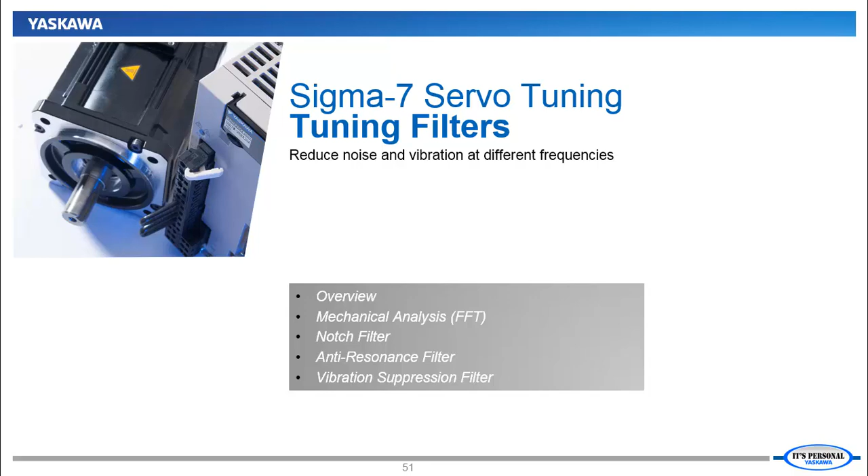Here's a quick preview of what we'll do in this video. After an overview of the tuning filters, we'll use the mechanical analysis function on the z-axis of the demo to determine what resonant frequencies might exist. Then we'll look at 3 different example mechanisms to set the notch filter, the anti-resonance filter, and vibration suppression filter, using the custom tuning window and editing some of the parameters directly. So get connected to your remote demo and follow along with me, and let's start filtering.

This chart shows the frequency spectrum of a machine from low to high. Every machine has some level of mechanical compliance and may tend to vibrate at certain frequencies. Filtering makes sure the servo control loops don't cause the motor to apply torque at those problem frequencies. This way, the machine can still be used throughout the rest of the frequency spectrum, improving performance and response.

Now there's a low-pass filter not shown here that just cuts off the maximum frequency response, but then the next highest frequency filter is called the notch filter, and it's good for covering frequencies about 500 Hz and above. Resonant problems in the mid-range frequency are covered by the anti-resonance filter, and at the lower end, all the way down to 1 Hz, into the tens of Hertz, is the vibration suppression filter. And you see there is some overlap between these filters.

The frequency parameters for each filter do have a range, but they're often better implemented in the middle of their range. And here we're listing all of the different parameters just for completeness. We'll be looking at these more closely as we look at how to implement each of these filters.

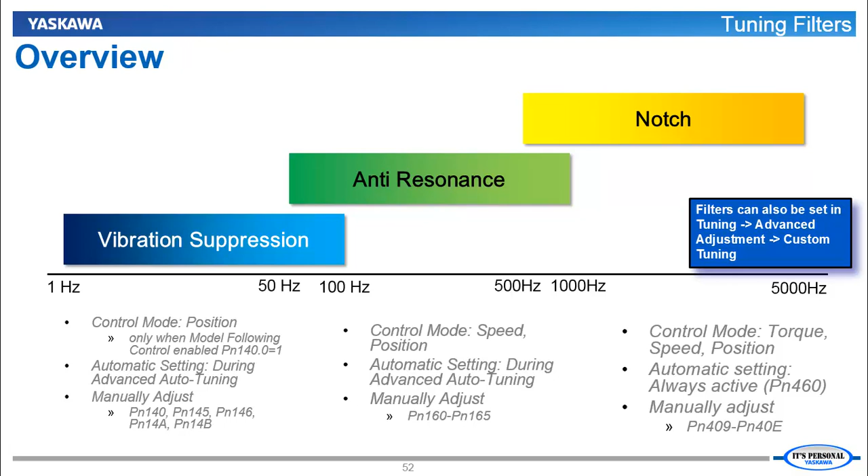So the big question is, how does my mechanism respond across the entire frequency spectrum? And to help you find this, SigmaWin+ has a tool called Mechanical Analysis. This software tool will cause the amplifier to generate its own internal torque reference frequency, sweeping from very low frequency to very high frequency. It'll run that through the motor, which is coupled to the machine, and the machine will move a little bit, and this function records the output.

And it may find that at some frequencies there tends to be an increase in amplitude, and at other frequencies perhaps a decrease in amplitude based on the properties of this mechanism. Any frequencies that have a high gain may require filtering, and if you enable the servo and you get this kind of oscillation or noise, you really need to take care of that before you can go on to do any other tuning. Oftentimes the auto-tuning will catch this and automatically apply it, but we do need to know how to apply these and understand each of these filters.

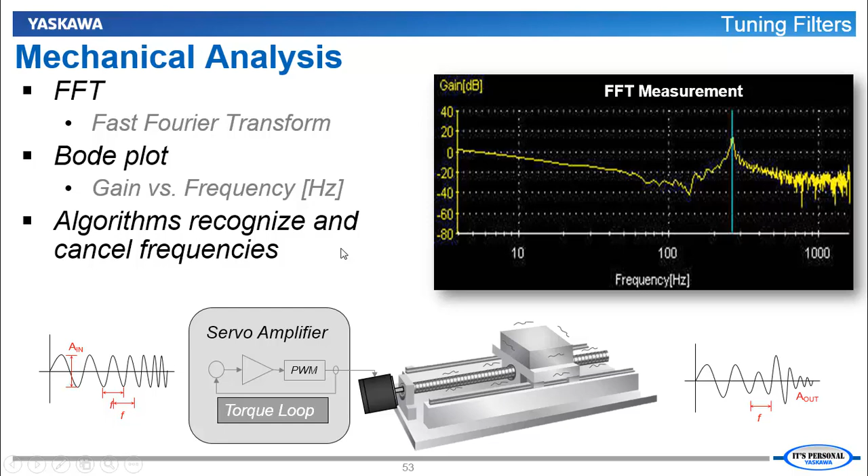But there's much to be learned by doing what we call this FFT, fast Fourier transform measurement, where we plot the gain versus frequency and look for peaks in this graph that indicate there is a problem at that frequency. This type of graph is called a Bode plot, and those 3 filters will then be able to be used based on the frequency that's found in the mechanical analysis. We'll also have a pretty good idea which of those 3 algorithms are the most appropriate to apply to the machine. Let's go try this out now in SigmaWin+ version 7.

I've got connection to the z-axis here, the SGD7S, and we've got connection here to the remote demo. And one thing you're going to want to do on this demo is get some audio feedback. You'll want to hear the chirps that go through the motor. That's instructive. You can do that with this speaker icon that says Open Audio. Be sure there's not a line going through it, and then you'll be able to hear with the microphone that's on this webcam. And then what I do is minimize SigmaWin+ a little bit and set it up so I can peek at that motor while I'm using SigmaWin+.

Now under the menu, mechanical analysis is under the solution category. The motor will move. Let's open this and then click Start. So what are we looking at here? There's a vertical mode selection just to be sure that the motor doesn't fall if you have a vertical load. You have the sampling time, and the sampling time determines the maximum measurement frequency. So the first time you do this, it's a good idea to leave this at the default so you get the maximum measurement frequency. And then later you can do another graph if the problem frequencies happen to be in the lower range.

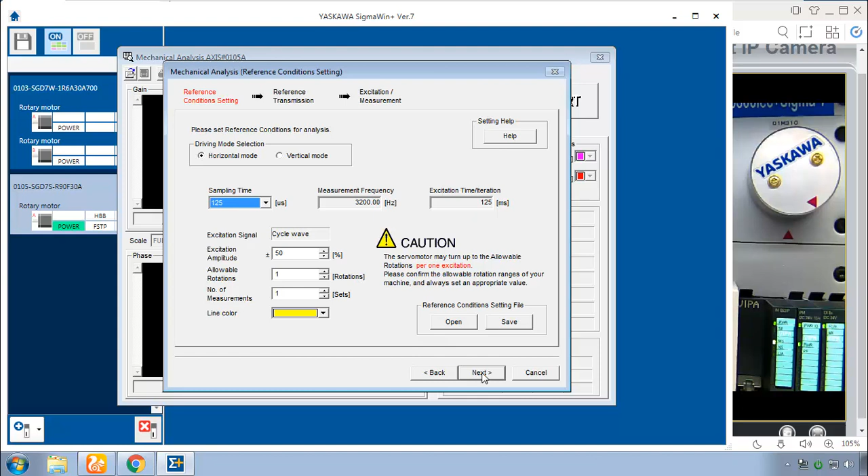Down here, the excitation amplitude is the percent of torque. 50% is pretty good. You can go higher, but you don't want to risk damage to the machine. And if your motor has been oversized or there's a torque limit in place, you may even want to reduce this. The allowable rotations is just to be sure that the motor doesn't go too far and run the mechanism into the hard stop. And you might do more than one measurement to interpolate the results between a number of measurements. For this first time, let's leave all this at default and just go ahead and click Next and Start.

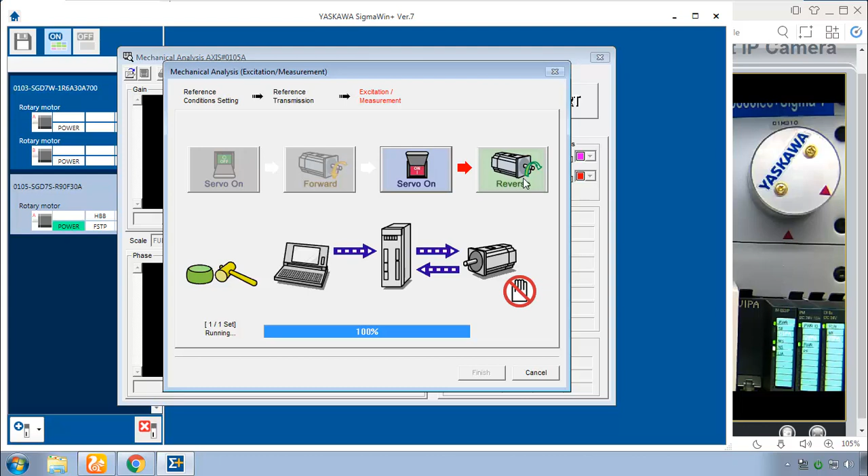This is a function of the servo itself. Keep clicking through it. You click servo on and forward. Did you hear that? Saw the motor move a little bit. We'll do it again in the reverse direction. Moves a little bit. There's a little chirp. That's the sound of all of the frequencies going through the system. And you finish it. So what we have here now is the gain versus frequency for this wheel.

There are some automatic measurements. I'm just going to clear those out. I hope you'll agree that this mechanical analysis is quite distinct from the other one I showed in the PowerPoint slide. There really is no peak, if you would. There's no big spike in the gain. It does kind of trend down.

The other part of this graph, however, is called the phase. And when the phase goes below -180 degrees, that's another good indicator that that might be a problem frequency. Right here, this is happening. And you're able to open this cursor button and drag around, look at different points. You can click a couple cursors down. You can see this frequency right here is 2000 hertz.

There's another tab here for notch filter setting. This tool is estimating a notch filter frequency of 3100 hertz, which is indicated by this pink line. So in other words, it's at the very upper limit of this measurement. Probably this wheel does not need a notch filter. After all, I don't imagine there's much mechanical compliance since it's just one wheel rigidly attached to the shaft of the motor. But since we're learning about filters, why don't we try this out?

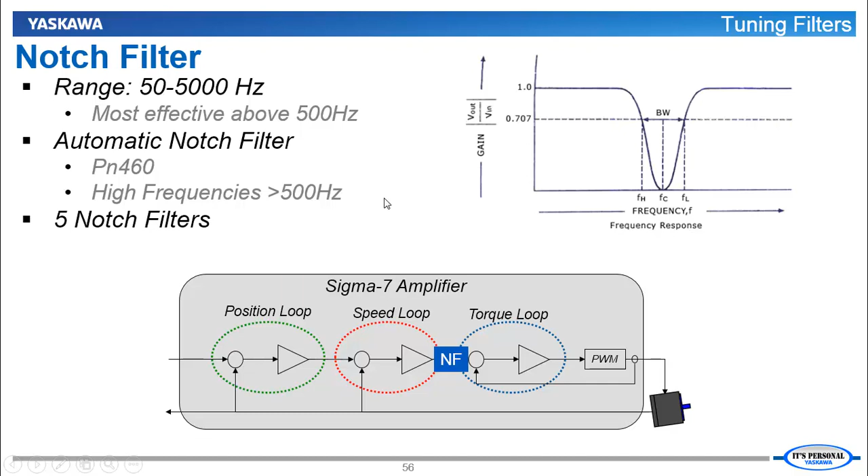What is this notch filter that we just set? Well, it's a way to filter out a narrow band of frequencies at the input to the torque loop. And it allows both lower frequencies and higher frequencies to pass through, just not that problematic frequency. And as we mentioned, it's best used above 500 hertz. In fact, we even have an automatic notch filter in Sigma7 that if there's vibration, it will detect it and set the notch filter for you automatically. We have up to 5 notch filters.

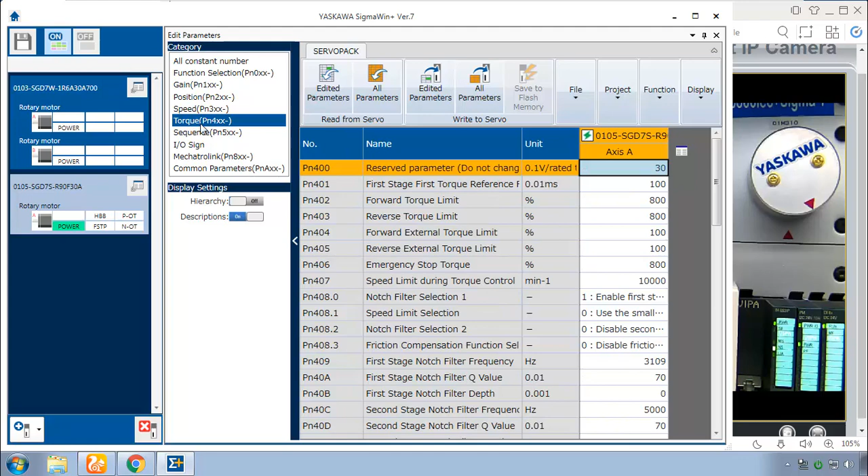Let's take a look at the notch filter parameters in SigmaWin Plus version 7. You can close out the mechanical analysis. Just go to Edit Parameters. Since the notch filter acts at the torque loop, we can go to the torque category. And here you can see all of the notch filter selections and frequency. There's the frequency that we set, 3109. There's a Q value and a depth.

Each of these 5 notch filters has a corresponding selection parameter to turn it on and off. There's most importantly then the frequency. That's the center frequency for that notch filter. This depth is just a multiplier for the strength of the filter, and the Q value is like a depth to width ratio. Depth and Q value can be left at default most of the time. If you go to extremes with these parameters, you can cause vibration in the system or make it too sensitive to the slightest mechanical change.

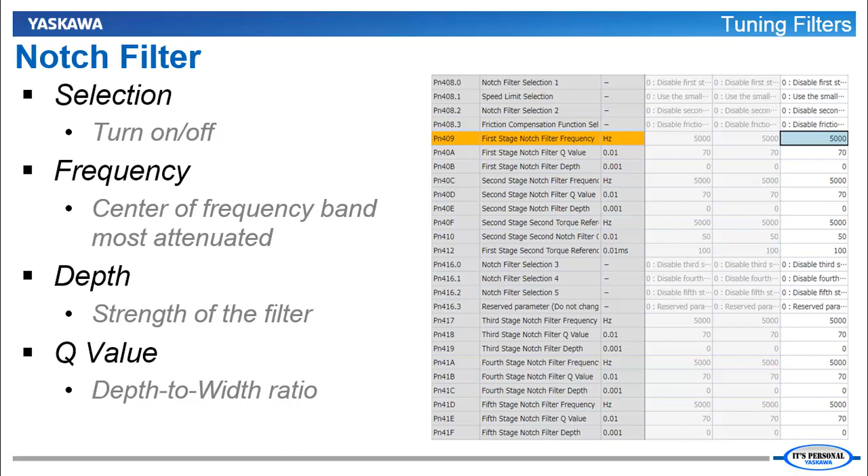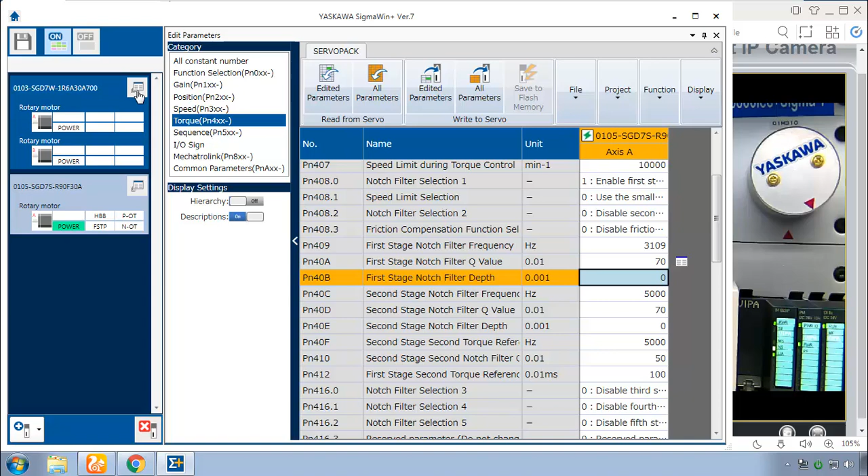Now let's look at an example of a ball screw actuator. Got the motor and the coupling and a ball screw. It's really an XY table. There's the Y-axis mounted on top, but we'll just focus on this lower X-axis. And in SigmaWin Plus, we've provided you with the mechanical analysis file. Use one of your offline axes here in the menu. You can go to mechanical analysis just to open up this file.

Got file open, and then take a look in your class materials for the mechanical analysis folder, and let's open up the ball screw mechanical analysis. We can clear out these cursors and you put down your own. Where do you think might be a problem frequency on this mechanism?

Probably right here at this peak. If you click down the cursor and look at the cursor position, what frequency is that? Mine ended up at 1175 Hertz. And you see this also corresponds to the location where the phase inverts from -180 to +180, meaning that the load vibration is driving the motor opposite the direction of the torque command.

What filter applies to this frequency range? The notch filter. This really is your classic example of the notch filter. In this particular case, I didn't really have to do anything to apply the notch filter. The actuator made a loud squeak for about 1 second, and the automatic notch filter turned on these settings that you see here. It did set a torque reference filter, slightly different than the default, enabled notch filter 2, set the frequency to 1240, it's pretty close to what we measured, and even did an adjustment on the Q value. And after that, it moved quite nicely and without any more noise.

Now let's move on to the anti-resonance filter. Do you remember the target frequency range for this anti-resonance filter? 100 to 500 Hertz, although it can go beyond that. You can see in this graphical example the vibration in the torque signal during motion before anti-resonance, and then how that's reduced with anti-resonance on.

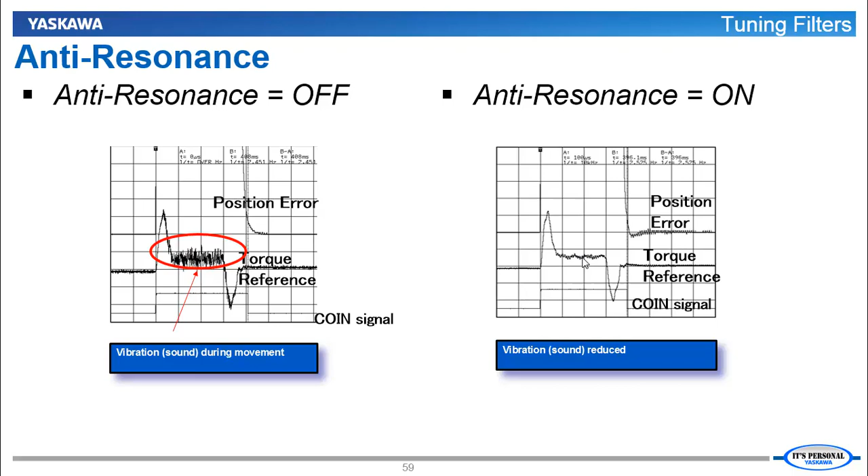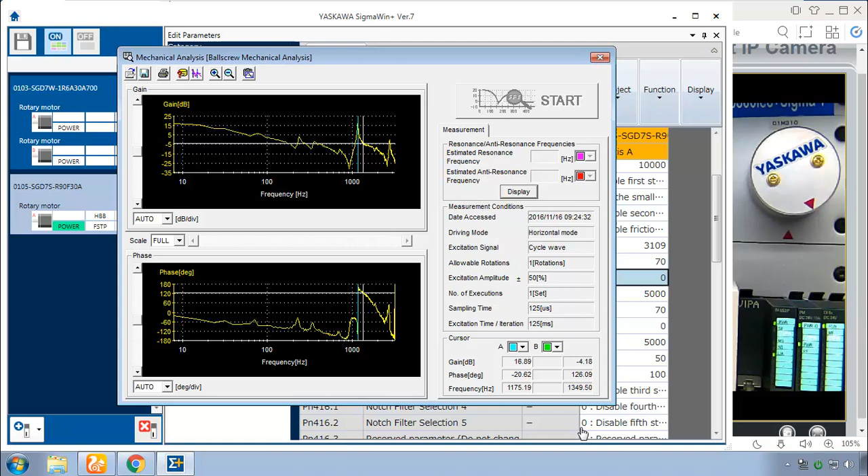Okay, to get to anti-resonance in SigmaWin Plus, you need to get to the custom tuning screen. So let's close out what we have here and start fresh on the Z-axis. Go down here to the tuning menu and click execute. All this time we've been using the tuningless method of tuning, the adaptive tuning. So we need to turn that off to get to this screen. Let's click OK.

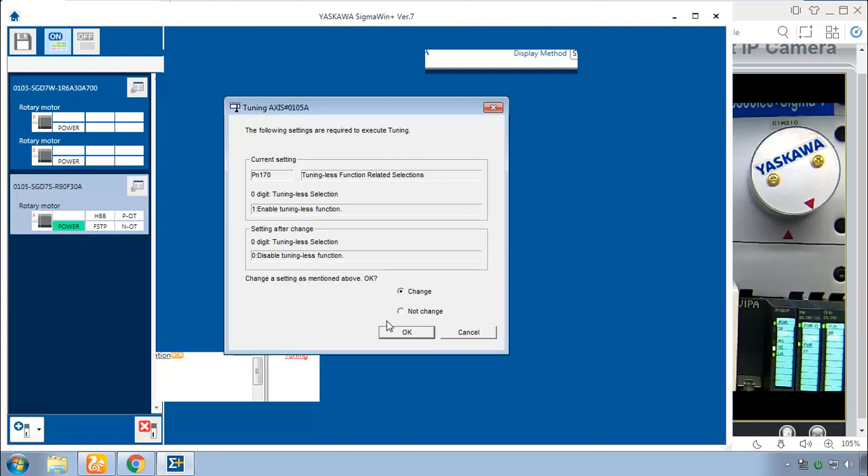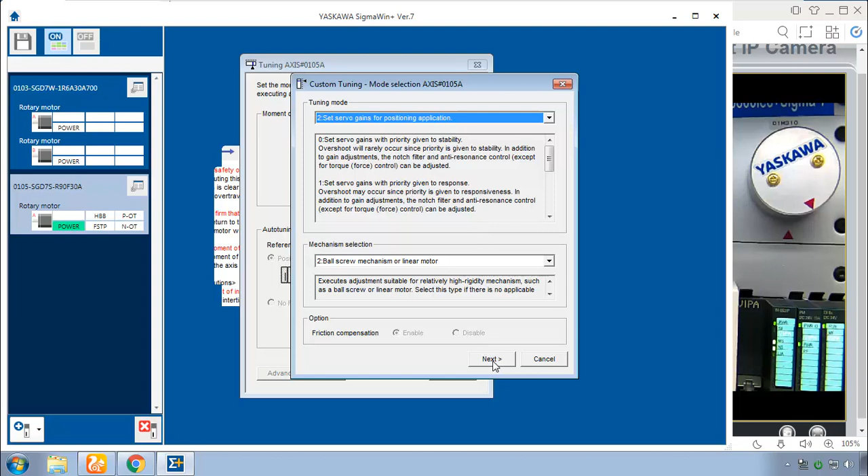Click custom tuning. There's going to be a few screens here to get through. Just click next for now. In a different video, we'll show you how to do all of the tuning options here. This moment of inertia ratio is about 26 to 1, so you put in 2600% and next. And this is where we want to be at the custom tuning panel. A little bit of a preview into the custom tuning method, which again we'll go through in another video.

So for now, please focus on the bottom section where you see those three filters: notch filter, anti-resonance, and vibration suppression. If there really was vibration, the anti-resonance control adjustment would light up, drawing your attention to this button. Let's just go to this button here anyway. And since we don't have vibration, we can go to manual set, where you're able to set frequency and damping gain.

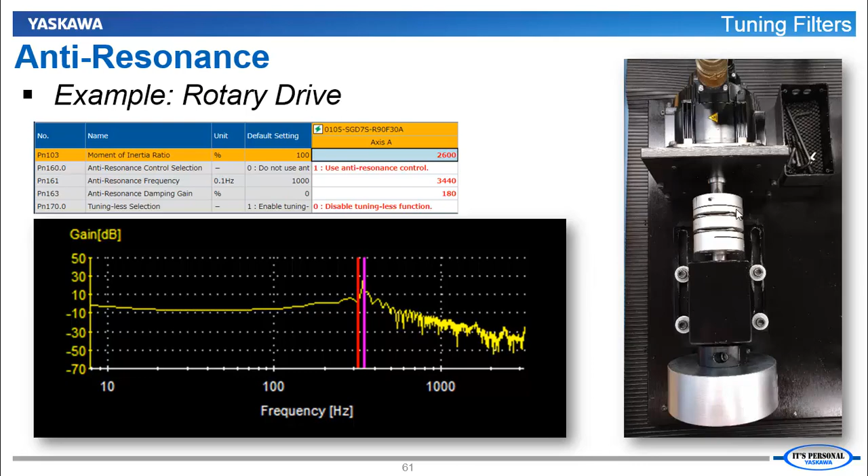Let's set it up for this rotary drive example. We've got this machine in the tuning lab. It's just a larger motor directly connected through a coupling to a wheel. Let's now look at the mechanical analysis file for this machine. In SigmaWin+, you can get that through the menu of the other servo axis, mechanical analysis, and open that up. And this is called the rotary drive mechanical analysis. It's open. We can clear out this auto measurement and put on your own cursor here.

What is the resonant frequency? See if you can find this by yourself. The resonant frequency is, according to my cursor, 344 Hertz. There's a pretty distinct peak right here in the gain plot, and the phase gets really messy after that frequency as well. So what filter applies for a frequency of 344 Hertz? Anti-resonance. When the frequency is low like this, that's a good example of a time that you could change your setup and run a lower mechanical analysis.

So how about we open that other file, go to open file here, and let's go to mechanical analysis for the rotary drive, file number 2. Here you see the measurement conditions. I had set the sampling time to 625 microseconds. And if you want, you could go back and do that on the demo. And we'll clear this out and put in our cursor again.

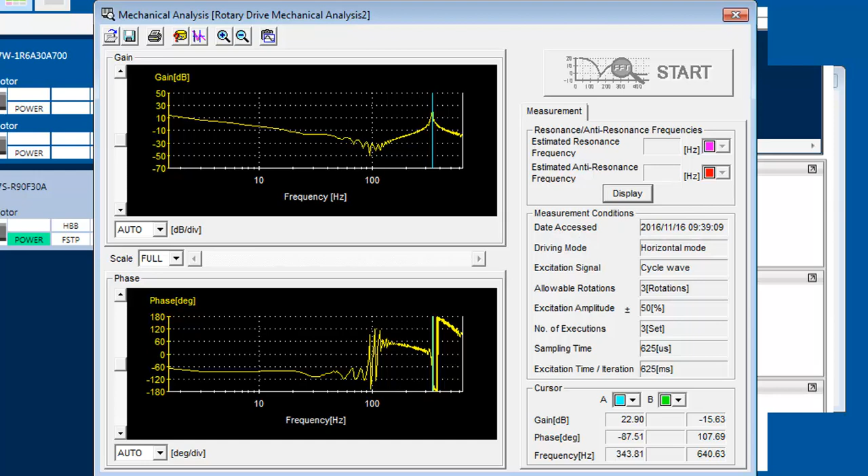We have a center frequency. Looks like it's more like 343.81. Yeah, still about 344 Hertz. All right, let's implement this on our demo axis here. I know it doesn't need it, but just so you can go and see how this tool works.

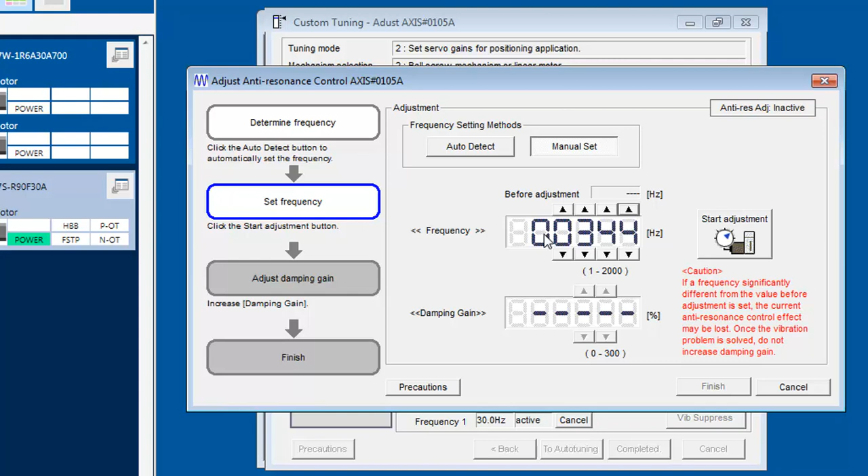You can go back to your anti-resonance control adjustment window that we had open, and you would turn it up to 344, and then you click Start Adjustment and start to increase the damping gain until the noise goes away. And you don't want too much damping gain, so you would turn it down until the noise starts to come back, and then turn it up until the noise goes away.

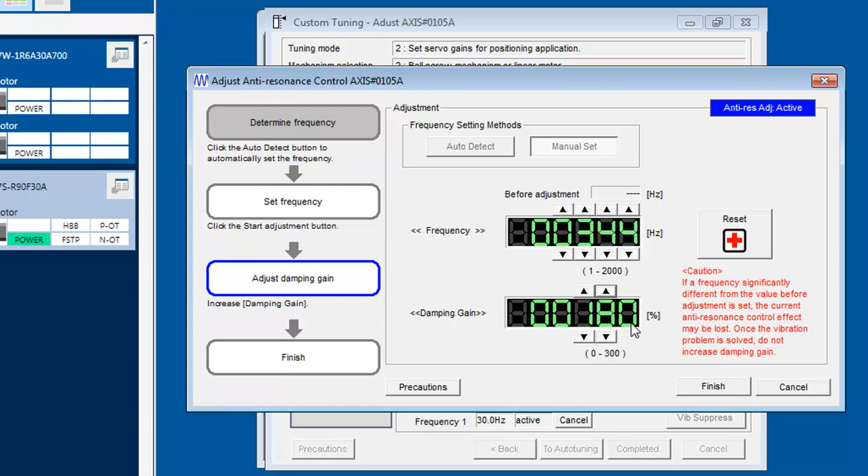You want to find a value that dampens the system, but you don't want that too high just because it could interfere with the performance of the system itself. So you set these parameters, click Finish. This is just a nicer interface. You could set the parameters directly. In fact, let's go see what those parameters are. Click Completed. Complete that. Let's close this all out and edit parameters.

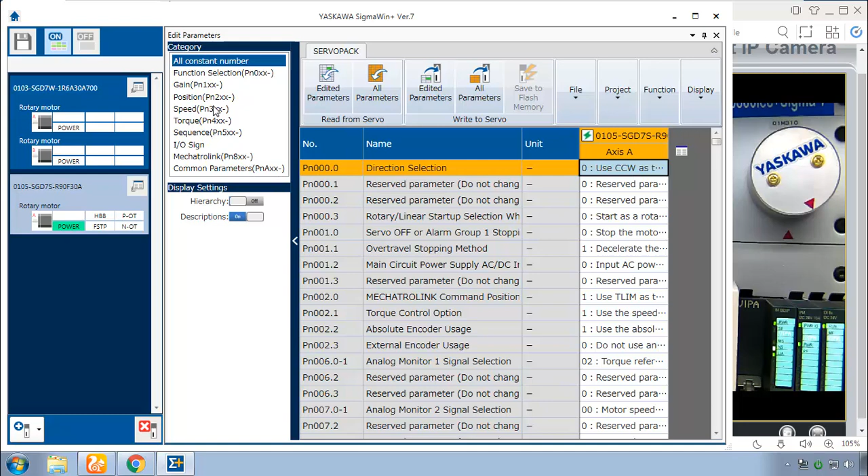Okay, anti-resonance is not a torque parameter. Instead, it is a gain parameter in the PN100s. Down here at the bottom of the list, anti-resonance frequency. There's our value set and the damping gain that we set. And again, this filter to turn it on.

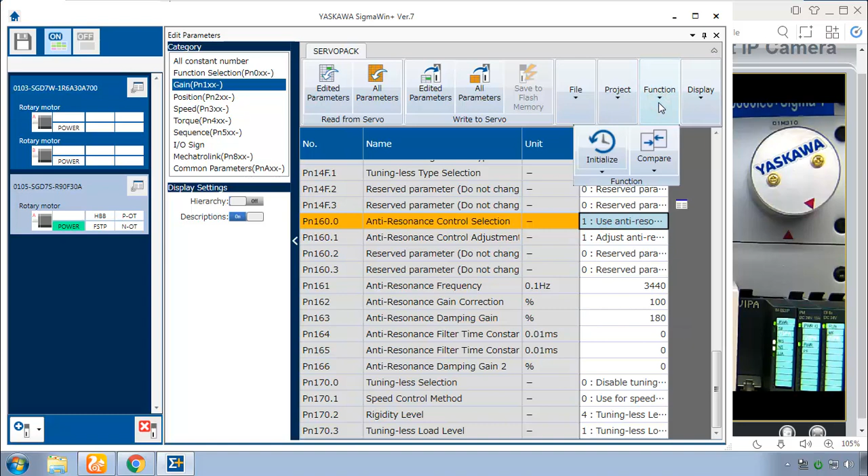Sometimes it's easier just to compare that to the defaults. And in the display comparison, you can see these parameters that we've set for anti-resonance control to turn that on, to set the frequency, and damping gain.

For the lowest vibration frequencies, we have vibration suppression. Low frequency vibration in a machine in the ones of hertz, tens of hertz is particularly troublesome because this is within the machine's operating frequency range. This type of vibration can be particularly noticeable at the start and end of a move, where you'll see speed and position error have this somewhat of a sinusoidal vibration.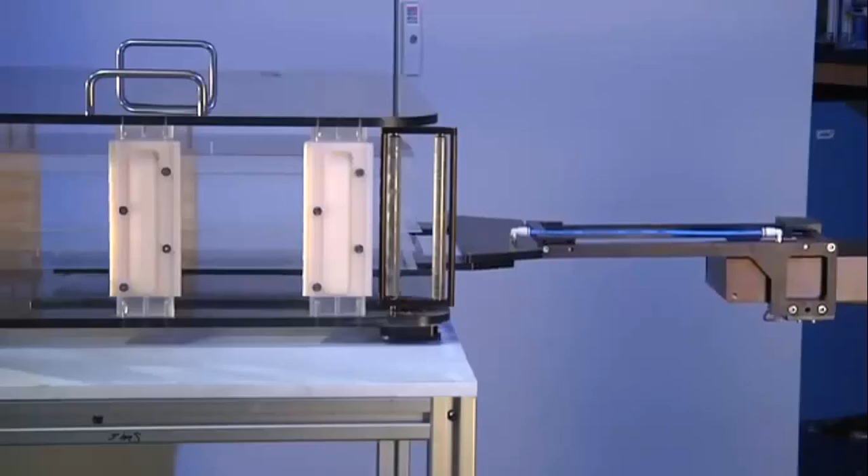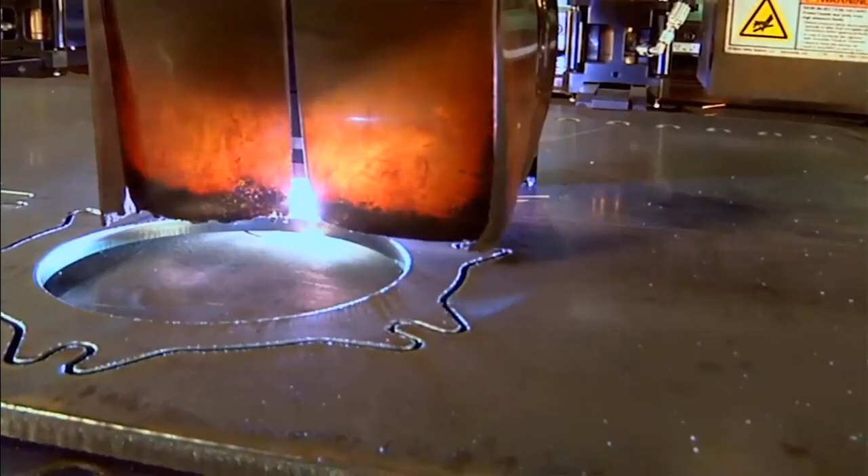This machine takes plates of glass and has to insert them into maybe an oven or a storage rack. And the product itself is just prone to vibration. Another factor is just very large machines will tend to have lower vibration frequencies due to their size. So it is a real problem, and it can be advantageous for compact machine design or some other design constraint that the actuator must be located somewhat at a distance from the actual workpiece.

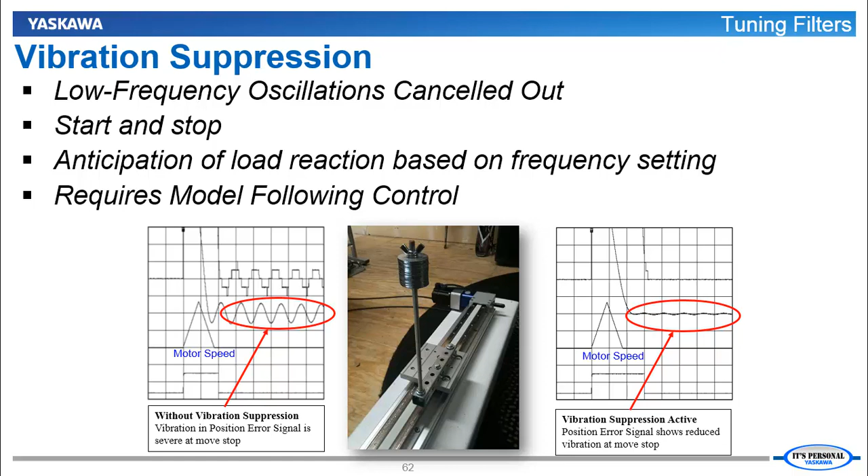So if the machine designer is able to confidently make this type of machine, knowing that vibration will not be an issue, it can remove a lot of those design constraints and result in better performing machines. So how does vibration suppression work? From a conceptual standpoint, I think we can explain it like this.

If you were to move a pendulum from point A to point B very slowly, I think you can imagine that it would be not too hard to move with a minimal oscillation at the end of the move. But if you need to move quickly and just stop your hand there, I think you know from experience that the pendulum will swing back and forth for a very long time. So how could you compensate for that?

Well, if you think about canceling out that oscillation by perhaps pulling back with your hand, you can kind of cancel out that oscillation by getting the right rhythm, so to speak, with your hand. This same concept is what's going on with vibration suppression. However, it has to be mathematically modeled, and that's our vibration suppression function.

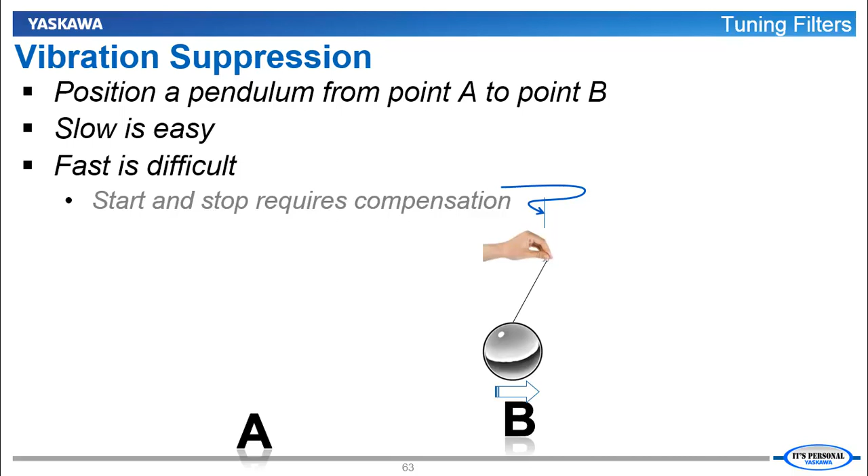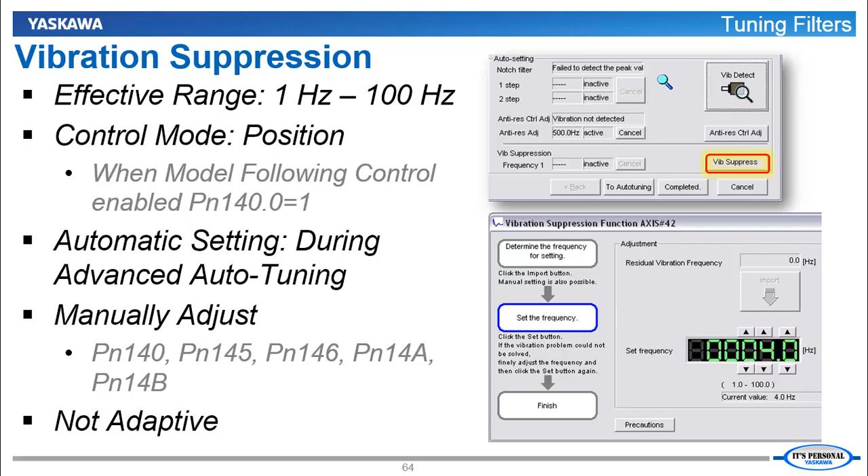As you saw in the previous section, vibration suppression is also accessed through the custom tuning function. So let's pull that up now in SigmaWin Plus. We can close this that we had up before. We don't need to save these changes. And let's open up the tuning, execute, advanced adjustment, custom tuning, click next, 2600, click next.

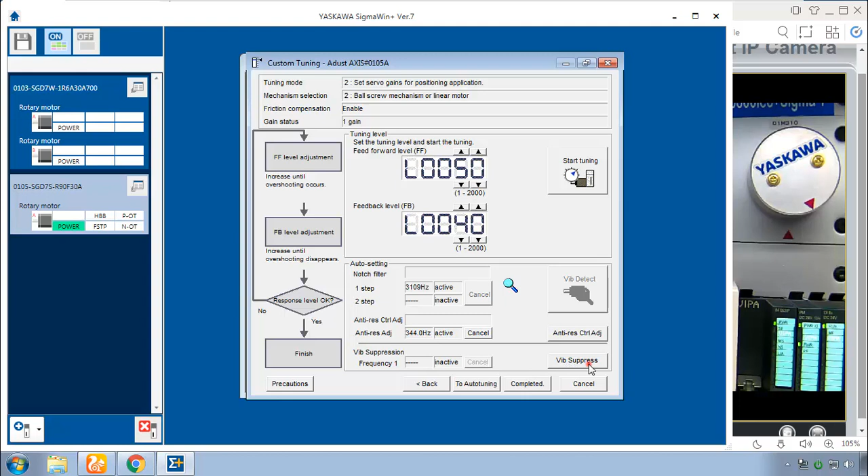And down at the bottom, let's give this demo some vibration suppression also. Vibe suppress. If the machine was in motion and it was oscillating at the end of the move, you would see this residual vibration frequency detected, and you could import it.

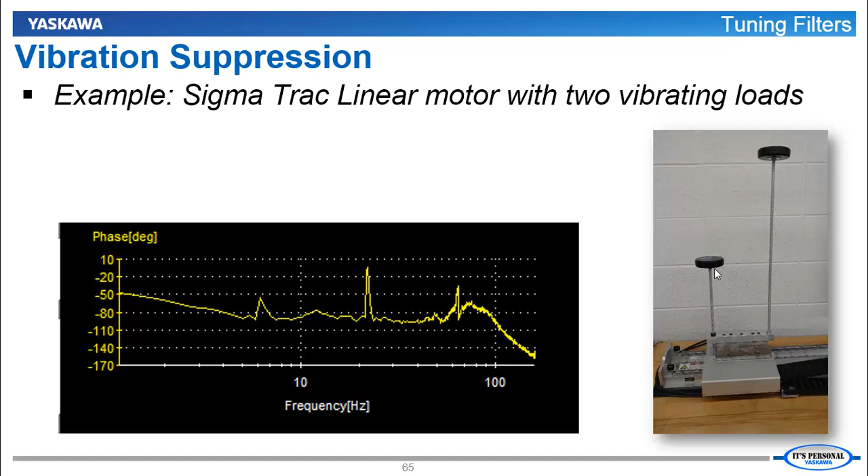For the purposes of this training, let's look at this example of a Sigma Trac linear motor with two threaded rods with a load at the end. It's the same mass, same rod, different lengths. And I think you'll agree that the longer rod will be vibrating at a lower frequency and the shorter rod will be vibrating at a higher frequency.

And let's use SigmaWin Plus. Again, the unused axis here for now. We can pull up the mechanical analysis again. And let's open up the Sigma Trac mechanical analysis. This was the mechanical analysis at the default settings. And it's not showing a lot.

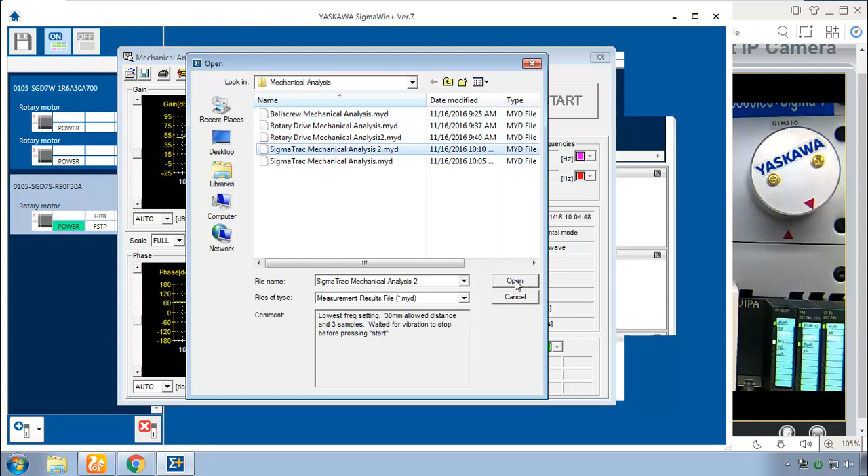So I went ahead and did another measurement, knowing that vibration would be an issue at low frequencies. I did the lowest possible. Let's open that one, analysis number 2. So this mechanical analysis only scanned up to a little over 100 hertz. So let me ask you, what frequencies look like they have something of a disturbance in the gain or the phase?

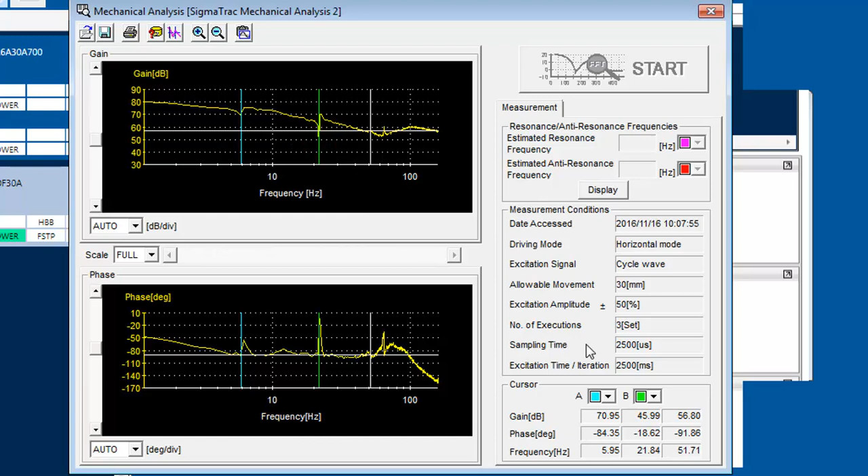Activate your cursor. Let's see what those frequencies are. Looks like the gain has a little dip right about here. The phase has a little disturbance there also. And then also up here, there's a little disturbance. And those two cursors read in at a little under 6 hertz and a little under 22 hertz.

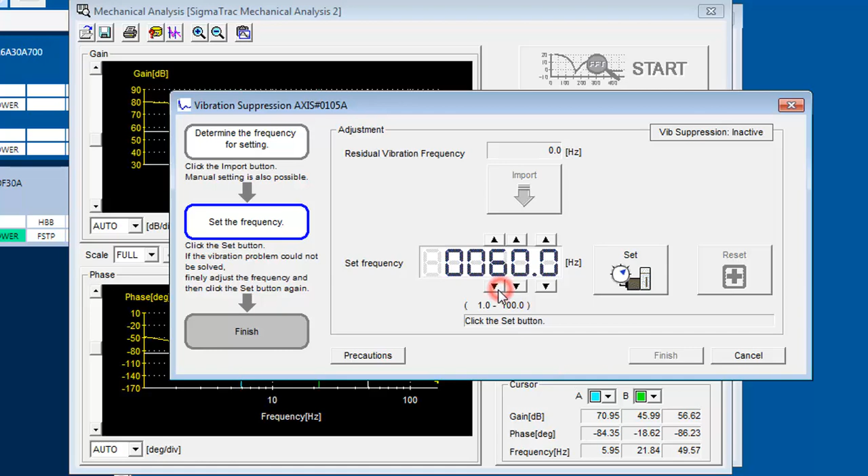So you pull up the vibration suppression window. Which of those two frequencies would you put in there? And what will happen is if you have two frequencies like this, you pick one. For example, let's go with the 6 hertz and hit set. And I get this timeout error. And that's because you do need to have the servo on when you set the vibration suppression through this function here.

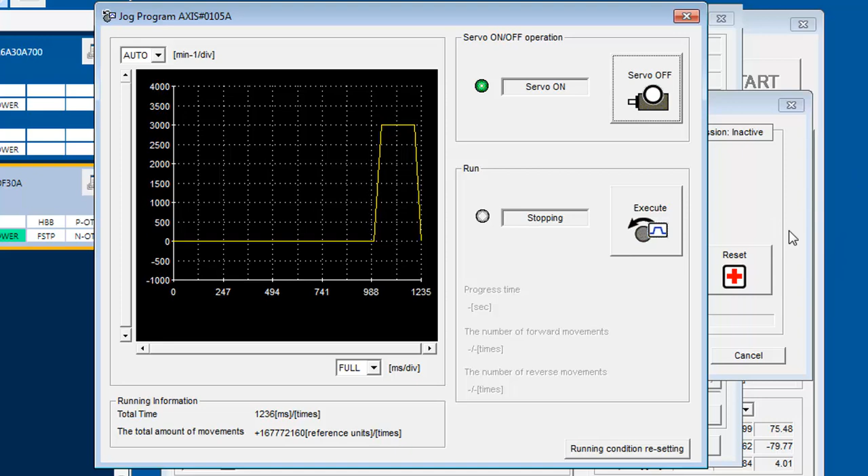We can do that, click OK here, we can do that through program jog and run that, turn the servo on. It needs to see that the motor does get into position, and without the servo on it may not be in position. So we'll try this again here. Let's go down to what we were going to set it as, 6 hertz, and set. Okay, we can set one frequency through this interface.

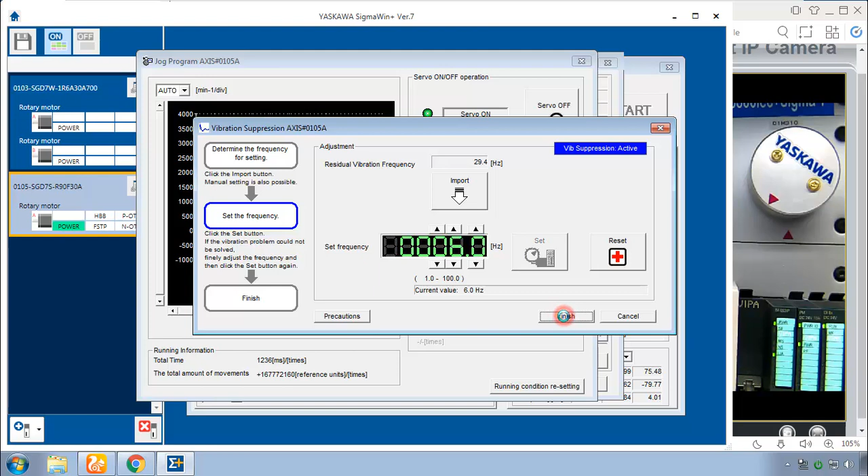And you would do this while you're running the load, and you would find the frequency that's given to you here. This number's just coming up. I'm not running the load, so that doesn't apply. You would find the frequency and visually look to see that the vibration is reducing. And when you've dialed in the right frequency, then you finish it off. And a second frequency can be set manually.

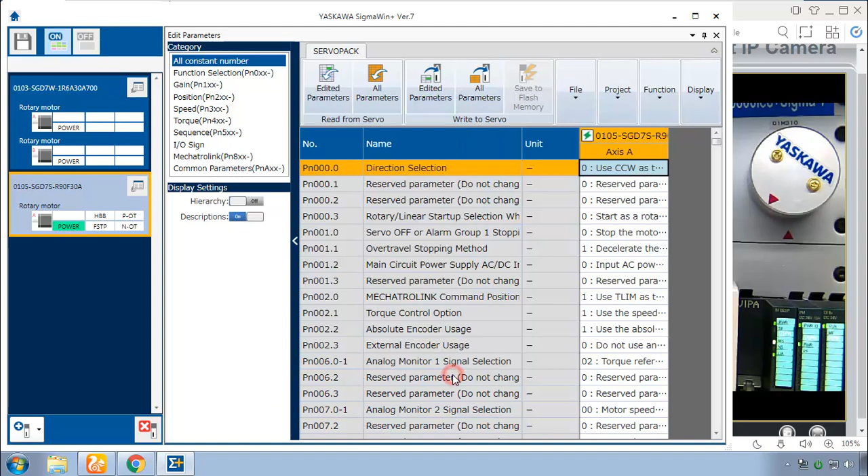We were going to set 21.84. We can do that in the Edit Parameters window. We should complete this, not cancel it. Close this function. It was 22 hertz. Okay, there's the warning. Finish this off. And again, the gain parameters include the Pn140s. You see here it says, do use model following control. It's important that that one's on. Vibration suppression is part of model following.

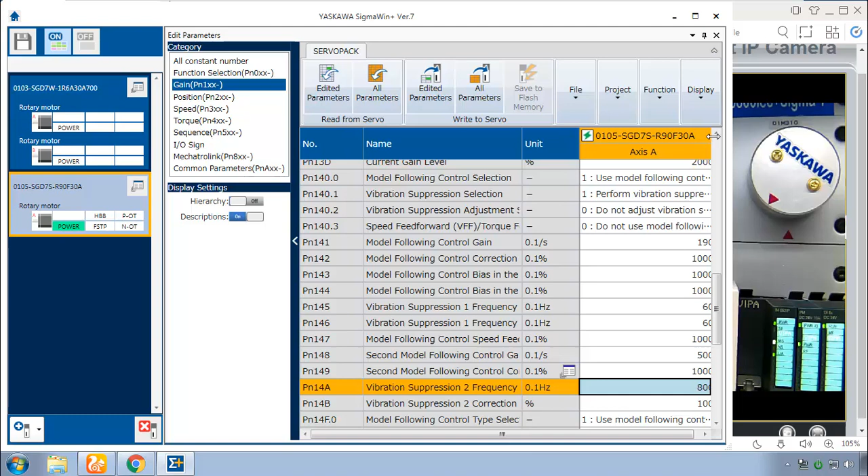So now vibration suppression has been turned on. Here's the 6 hertz frequency that we just set. And you see there is a vibration suppression number 2 frequency. And we'll need to set this one, but you also need to turn it on. That's under Pn140 digit 1. Perform vibration suppression over 2 specific frequencies. So change it to 2 frequencies. That activates suppression frequency number 2.

So that's 220 tenths of a hertz. And looks like there's a correction factor that you could also apply. And we can write all those in to this poor demo wheel that's now set up for a notch filter, an anti-resonance filter, and a vibration suppression filter, and it doesn't really need any of them. And just to conclude this, let's run this motor and see what it does. Close this off.

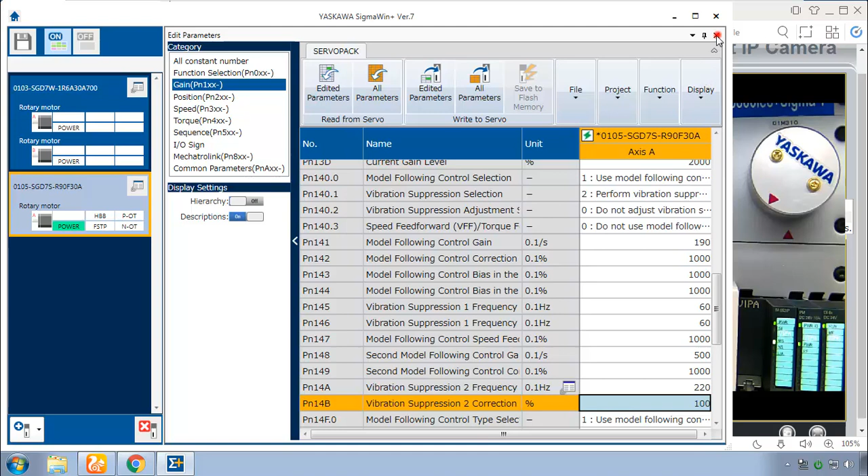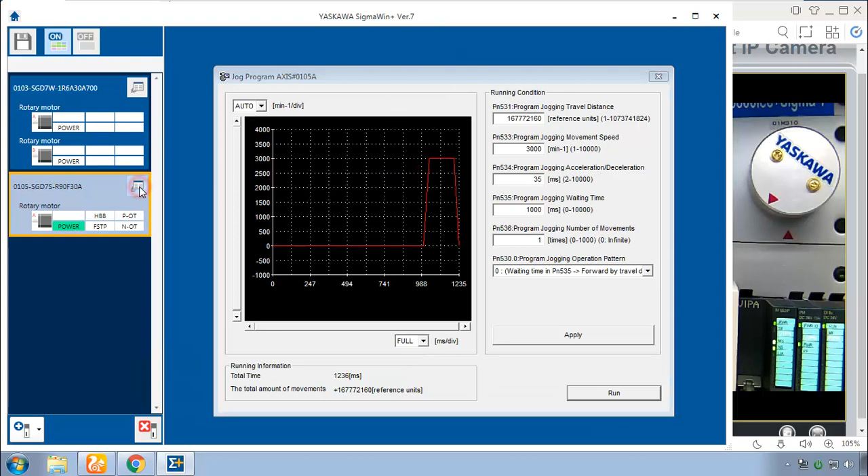So we'll start by getting the program jog ready to go. Program jog. We have this move set up from the previous video. I'm going to just change it to 1 time movement. And we'll run a trace. And I will set up for checking the speed reference over 750 milliseconds. Start that trace. Now run this program jog 1 time.

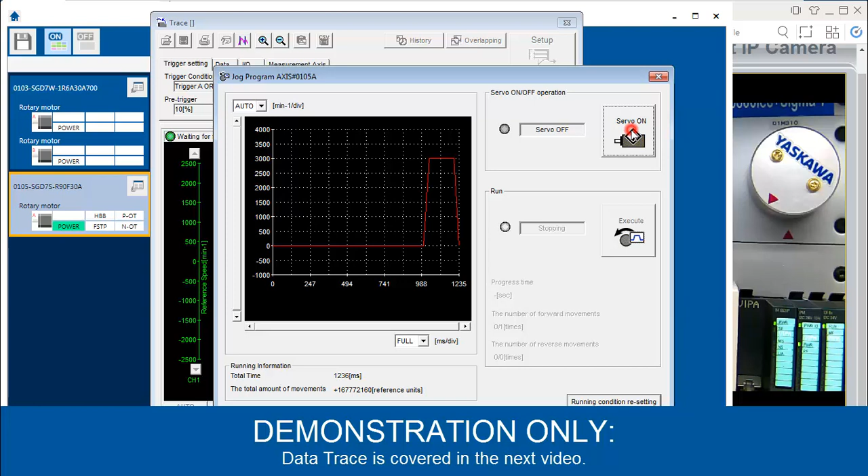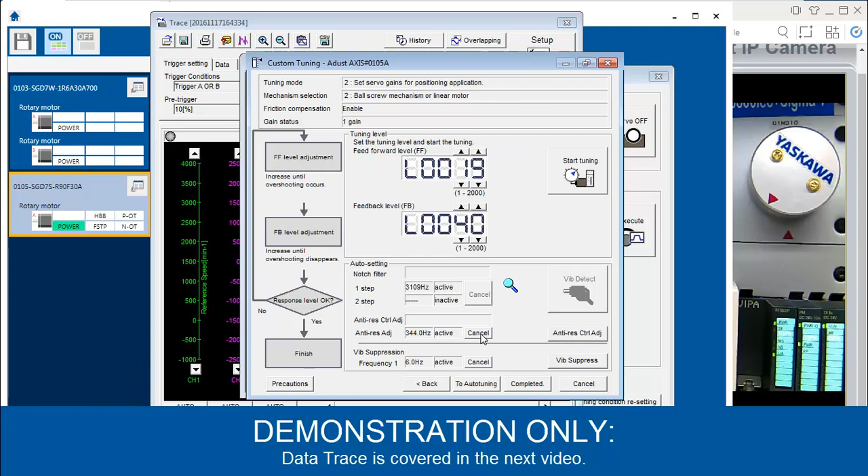Okay, we got the graph, and you see that the servo is applying a torque to cancel out the expected vibrations. Maybe I'll just save that for comparison. Now let's take all those filters off. One last time here, advanced adjustment, custom tuning, and make our way here to the custom tuning panel. You see that you can very easily cancel the notch filter, cancel the vibration suppression, and click completed and finish.

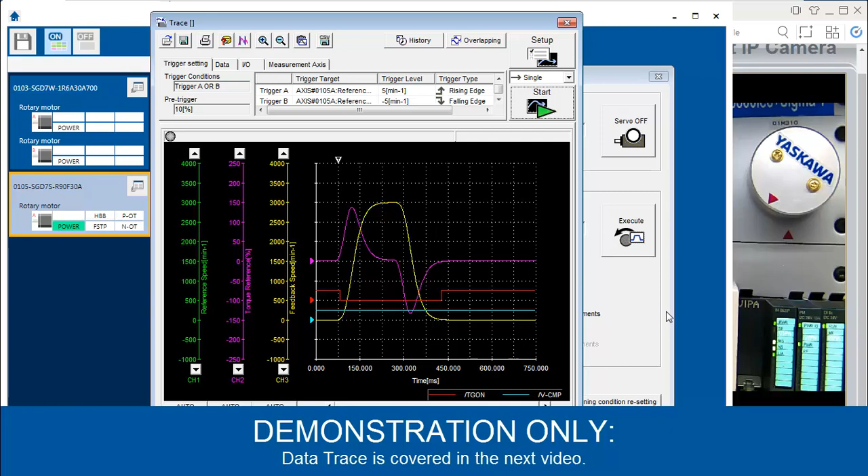And now start this trace again. Execute again. But you see a distinct difference, and I think you'll agree that this motor, which does not have resonance or vibration, is better off without those filters. So you don't want to put those filters on if you don't need them.

And one thing that's kind of cool here, the data trace, is this overlapping. You can put in these two and compare them. See, there's a definite reason not to put on filters that you don't need. I hope this tutorial has given you a better understanding and a hands-on experience now with using these filters. There's a tuning video for each of these machines we have in the lab, where I talk through the entire process from beginning to end.